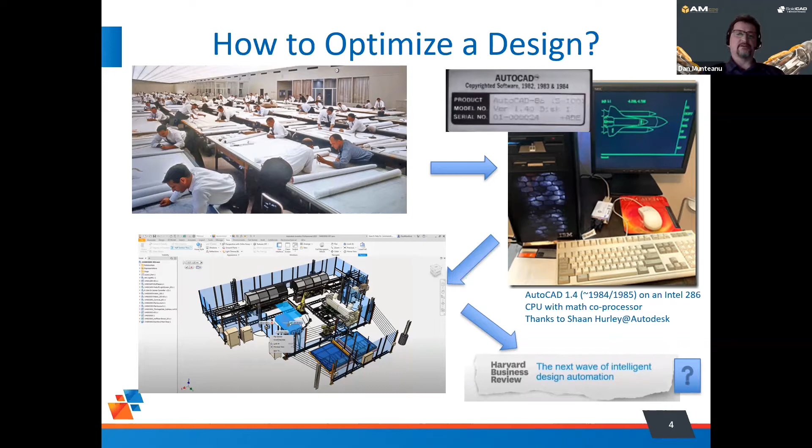All the way to current times of Inventor 3D parametric modeling. And I guess the question is, what's next? What is going to be the next revolution that Harvard Business Review named once the next wave of intelligent design automation?

The traditional optimization methods are pretty straightforward. You take a known solution, you do some simulation and testing, either virtual or physical analysis, to confirm design validity. Chances are changes will be required, so more CAD modeling, and you go back to the first step, iterating and spending more time trying to chase that ideal solution.

We have been doing this for at least 30 years in parametric solid modeling. Newer techniques like topology optimization are already in place, and for those of you who are Autodesk Inventor users, you recognize these pictures on screen — it's the shape generator in the Inventor stress analysis. So nothing wrong with this, it's just that we obtain one solution which depends a lot on the starting shape.

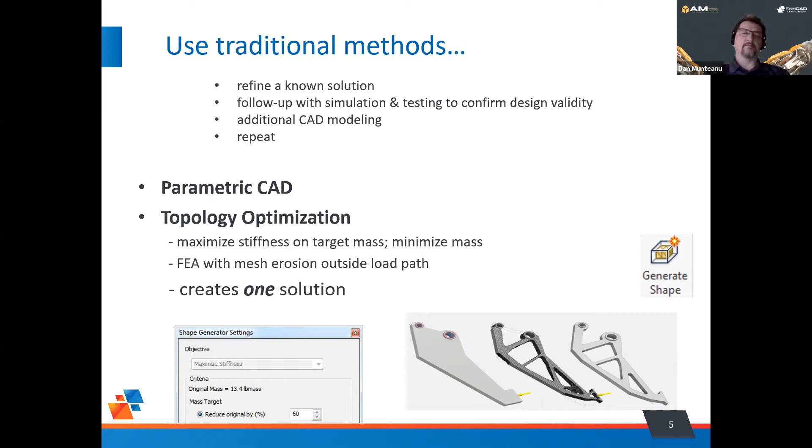It's a technique that simply removes material outside of the load path and usually has a single goal, a single design objective. Moving from here to generative design, we're not just optimizing at that point — we're actually exploring design alternatives, and we can only do this because of the newest artificial intelligence and machine learning algorithms that have been developed quite recently.

This Autodesk generative design solution is cloud-enabled, powered by Amazon Web Services and NVIDIA. It uses different services — EC2, P3 for GPU computing from Amazon, the storage S3, and the machine learning, the famous Amazon SageMaker. The advantage here is we're getting viable outcomes presented to the user at the same time, so multiple solutions, and this explorative approach is multi-goal driven.

So it's a multi-goal optimization process, and users can do various trade-offs for performance. There's lightweighting in place here obviously, but the critical aspect compared to classical topology optimization is the manufacturability of the parts. Different manufacturing techniques are going to be available, as you'll see shortly, and this will allow us to create parts which are ready to go, ready to be produced.

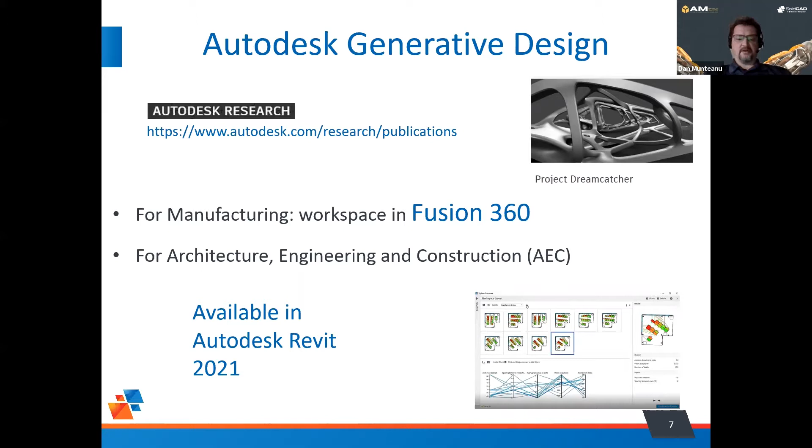They developed what used to be known as Project Dreamcatcher a few years back, and this technology is out in the open. It's not a preview, it's not in beta testing—it's currently being used by customers all over the world. On the manufacturing space, we have an implementation in Fusion 360, and there are newer approaches of the technique starting to become available in other industries, like AEC, currently available in Revit 2021.

So what is generative design, in case this term is relatively new to you? It's, as I said, a multi-goal optimization procedure that enables artificial intelligence algorithms to search for optimum solutions based on multi-goal criteria.

And there are some clear benefits to engineers in terms of being able to look at multiple solutions: improving product performance, picking up the best of the results, increasing product innovation, allowing you to look at multiple alternatives, design shapes that are otherwise even hard to imagine, and not in the last respect, reducing product cost. So improving performance while reducing cost, which is kind of like the holy grail of design.

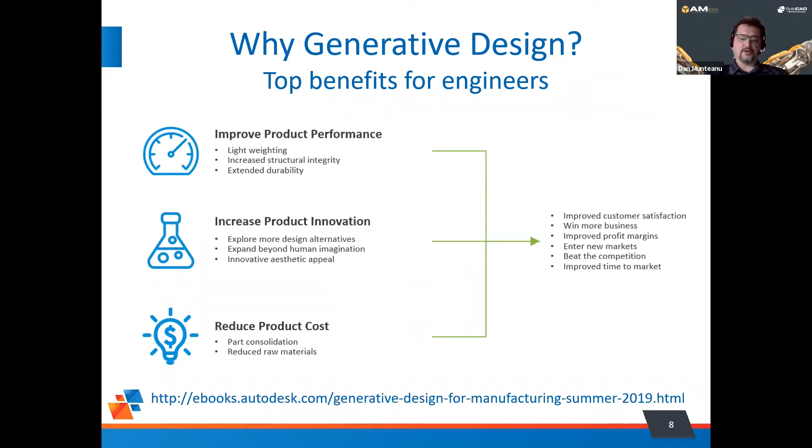If you want to learn more about this, there's a link at the bottom of the slide to an ebook by Autodesk. I encourage you to download and read it.

Now, I mentioned the GD implementation for manufacturing is in Fusion 360. I'm sure most of you have heard of Fusion 360. If not, hopefully this slide will spark your curiosity to run a quick Google search and read more about it on the Autodesk website. It's a cloud-based platform, multidisciplinary, with collaboration at the forefront.

Anything from 3D parametric and direct solid modeling, surface modeling, electronics design—so printed circuit board—rapid prototyping, manufacturing workspace, collaboration, stress analysis, and more newly computational fluid dynamics analysis, as well as, not in the list here, generative design.

Definitely a platform that you want to get to know better and think about where it can fit in your design process.

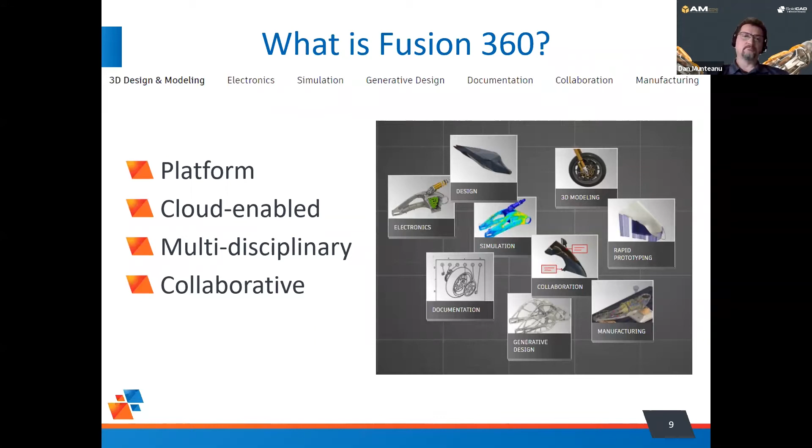So the GD, generative design implementation in Fusion 360, will let you generate multiple CAD-ready designs with real-world manufacturing constraints based on the performance goals you've added. Multiple outcomes is the important aspect here—you're going to be able to explore hundreds, if not thousands, of design variations and pick the ones most suitable to you.

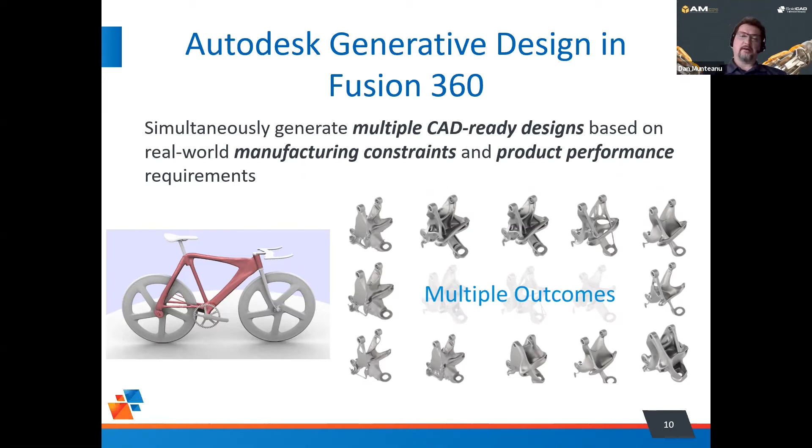Traditionally, generative design is considered a shape generation tool that produced what were half-jokingly called alien parts. Maybe some of you are science fiction fans—what comes to my mind is Ender's Game, the movie where the Formic planet was described. Anyway, alien parts through and through.

But the latest updates of generative design—and by latest I mean about a year already, which in Fusion 360 update terms is probably at least 6 updates—allow for implementation based on traditional manufacturing methods. So subtractive manufacturing methods based on 2-axis cutting, water jet, plasma cutting, or milling are now available for your selection. These manufacturing methods are considered through and through when these algorithms try to generate the shape—so 2.5, 3-axis, and even 5-axis milling, as well as die casting.

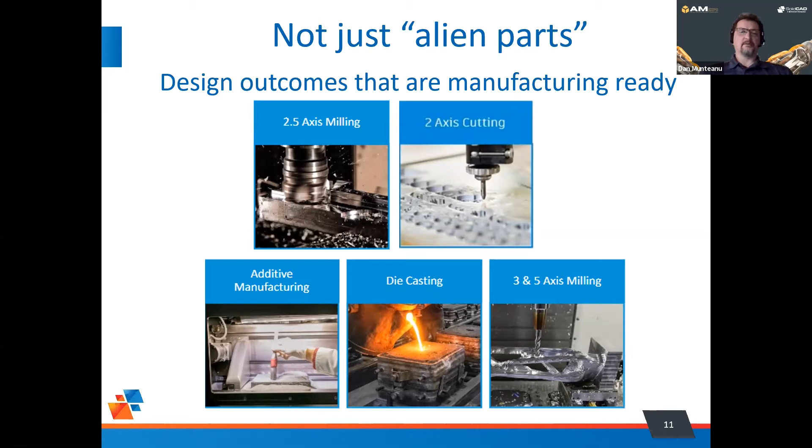Additive manufacturing is still a very important aspect of generative design. Once you really want to go organic shapes and free form, that is probably the only way you can achieve some of these.

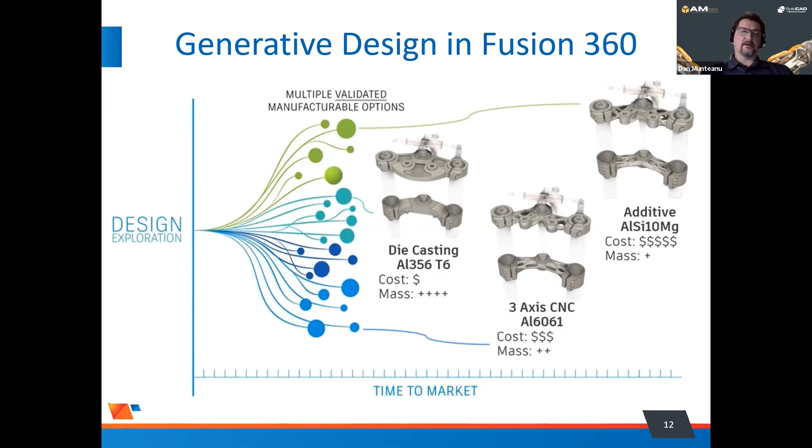So if you consider these advantages of a generative design process: being able to operate with multiple materials and create shapes which have specific strength constraints, cost constraints, mass constraints, and being able to operate within a set of real-life, manufacturable type materials. It's going to be important here, all in the context of trying to reduce that time to market.

Here's an example from a Fusion 360 and Generative Design early adopter, MJK Performance in Calgary. They produce high-end aftermarket parts for Harley Davidson motorcycles. Here's an example of this triple clamp part, where a human design was improved by a weight reduction within still a specified safety factor, being able to produce these parts using 2.5 and 3-axis milling.

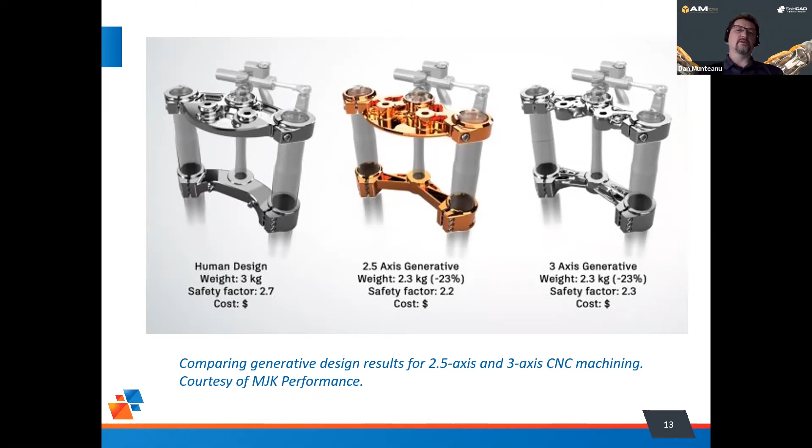Another aspect I wanted to mention before we get into the tool—I promise I won't bore you more with slides—is the fact that we're actually able to look at true manufacturing cost and have that information right away when you make a design decision. This is through a partnership with aPriori. They produce a leading design-for-manufacturability and cost tool that uses large databases of materials, processes, and manufacturing data, tolerances, and so on, to accurately estimate the cost per part for a certain production volume. So you're trying to get to the right balance of manufacturing cost, production volume, material cost, and so on.

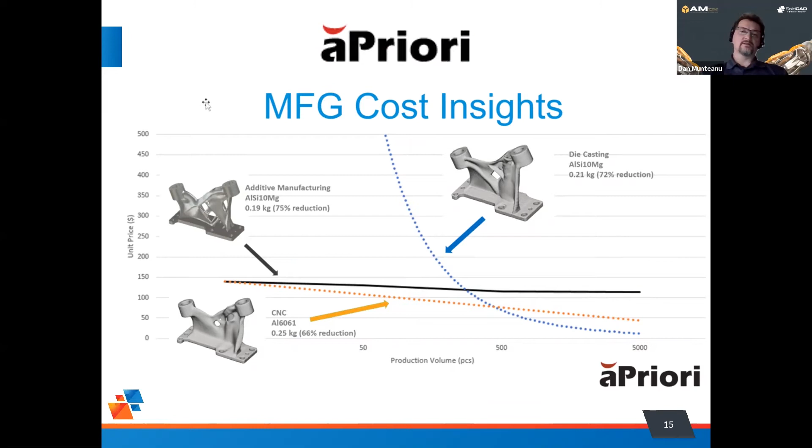So let's look at the generative design process, the step-by-step process in Fusion 360. It is pretty straightforward, like pretty much Fusion 360 is in terms of interface and workflow. Let's say four major steps until you get to actually use the part in your own assembly. So we start with a setup in a design space.

We go for an exploration of the outcomes, so-called, and we take that into the 3D model and validate it. So I'm going to jump into my Fusion 360 here.

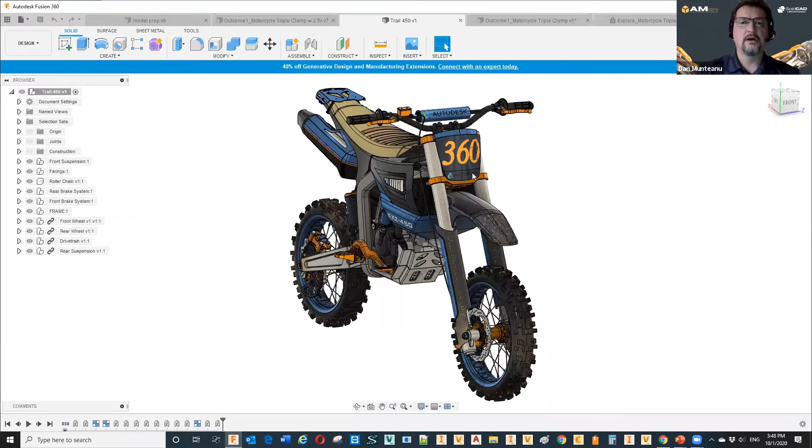I hope you can still see my screen here. All right, so we're going to walk through a simple example similar to the MJK Performance triple clamp. We have here a motorcycle model, courtesy of Autodesk. Thank you. And we're going to take...

We're going to take those into a workspace in Fusion called the Generative Design workspace. We're going to look at some simple geometry creation, and the important part here is going to be to define what's known as the preserve geometry. So keep in, do not modify, do not delete, do not change. Specifically, these are going to allow us to maintain connections with other components in our assembly.

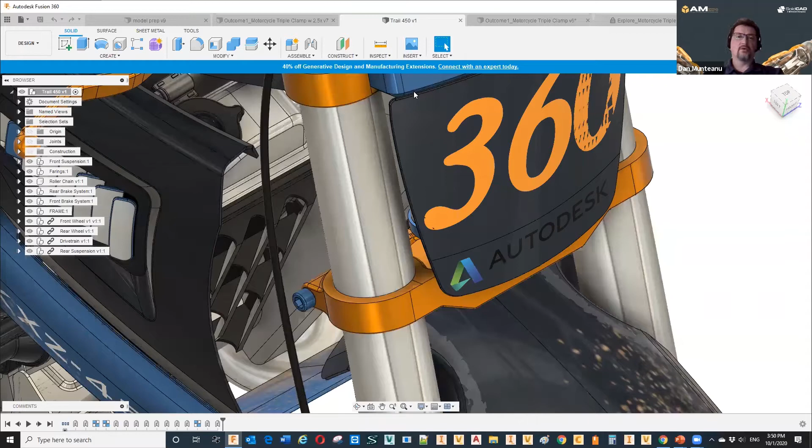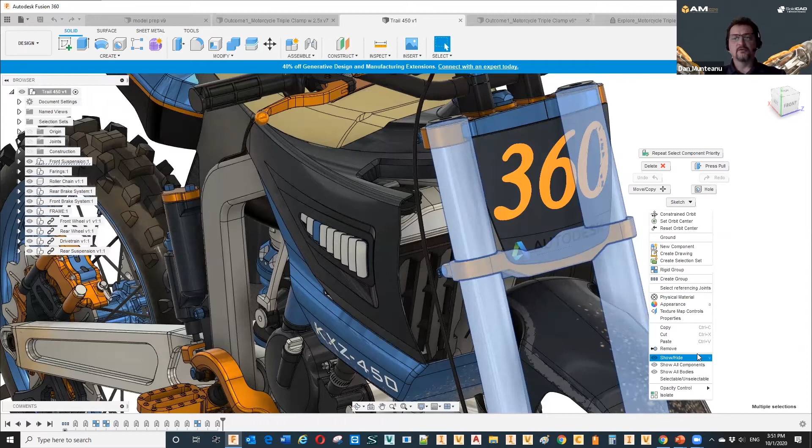We're going to start by selecting the components here. So let's go grab these, right? So we can isolate these, and that will allow us to hide everything. Or we can simply take those and copy paste them into a new design, right?

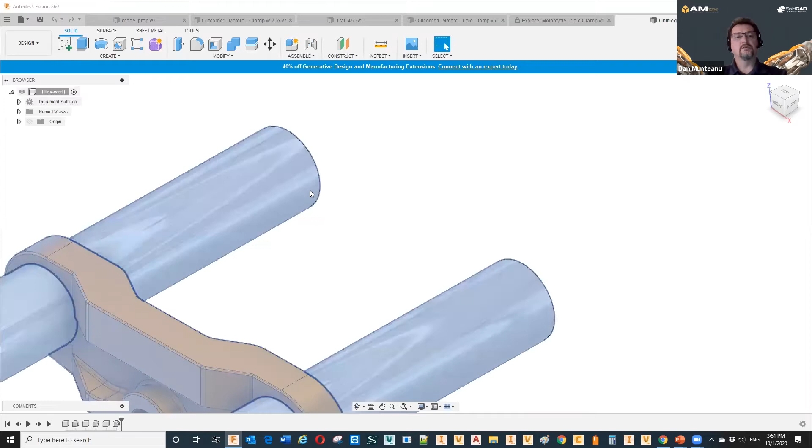So I could also do this and just paste as new, right click into a new design here, and let's just take a look. So we know we're going to want to connect with these two struts. This is the current design. Let's see if we get...

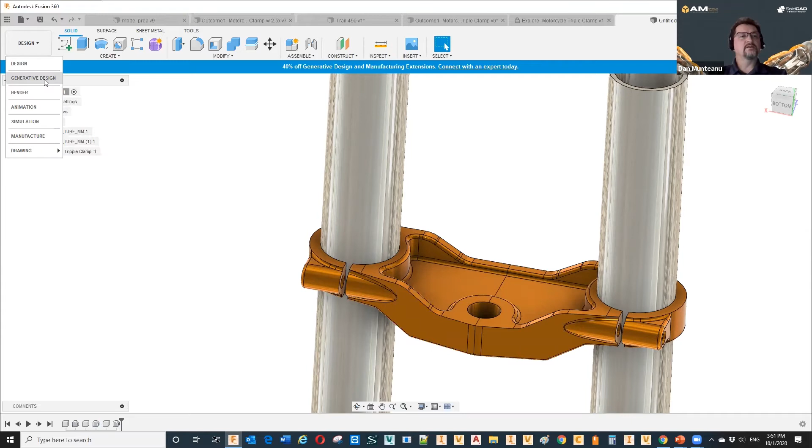Artificial intelligence algorithms to generate something different. And we're going to go to the Generative Design workspace now. So in the Generative Design workspace, we have this opportunity of creating now some additional geometry that we will use...

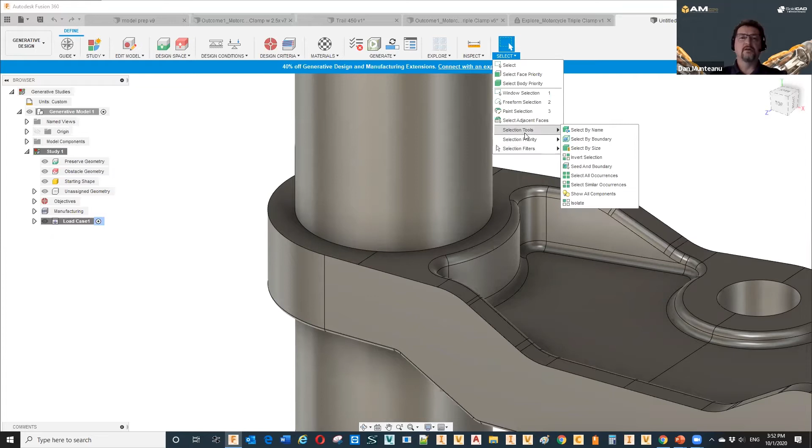As preserves as well as keep out. So for example, for those of you who maybe have not seen Fusion before, if I'm going to jump into the edit model here, if I'm to create a sketch on this face and maybe project some geometry...

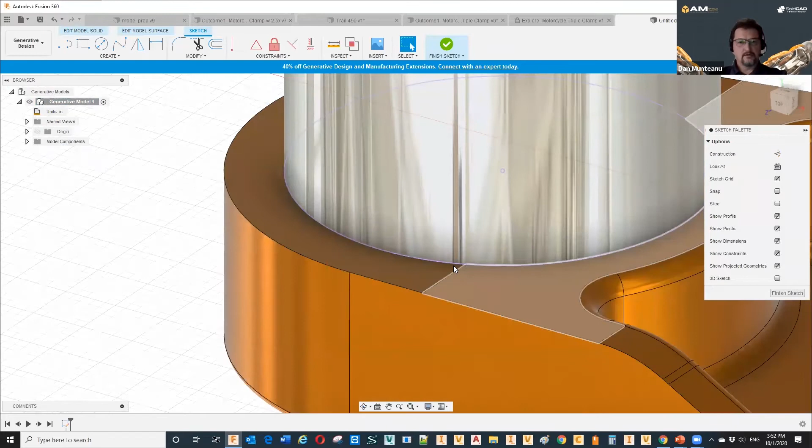And let's say offset that projected geometry, which was here, a certain amount, right? So I could take that. Let's do the same here. I could take that and use it as a sketch to be able to create my extrude. Let's say 8.5, right?

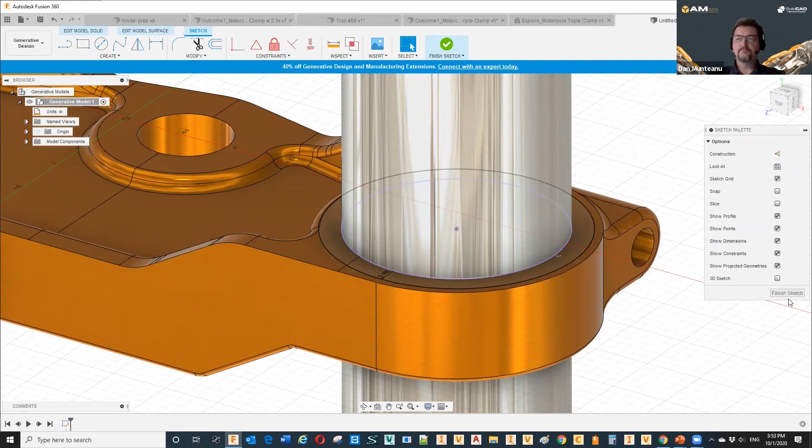To create my preserve regions here. So these are going to become now new bodies, new solid bodies. So I'm selecting these. I'm creating a solid body of a certain height. So a typical parametric solid modeling.

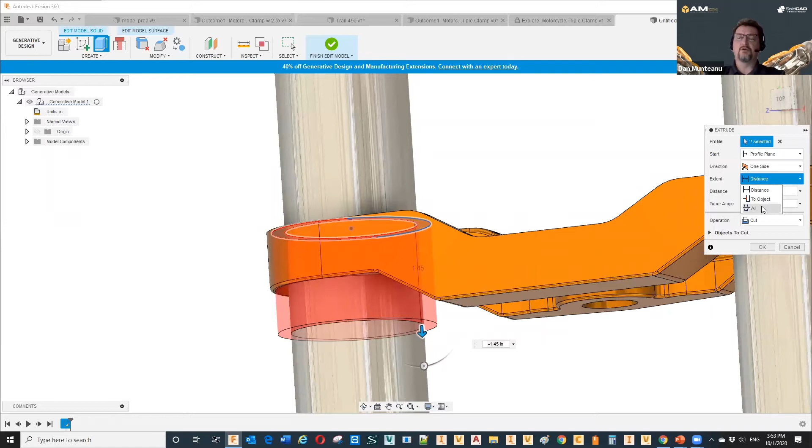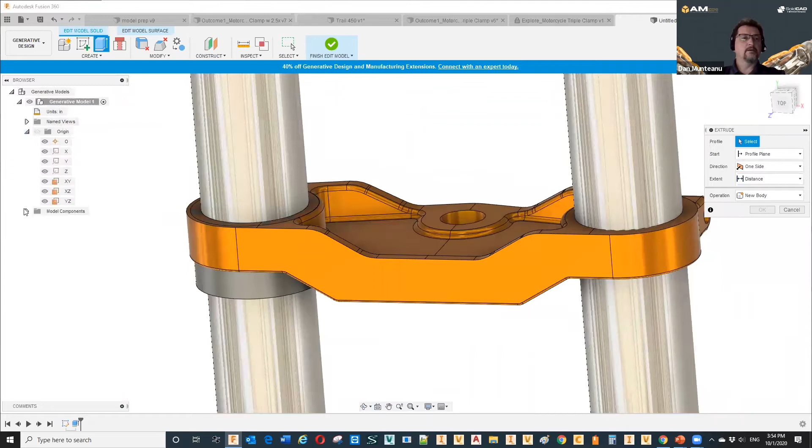The advantage, though, is the fact that I'm doing this in the context of my generative design environment. So why is this important? Well, it's important because it actually does not affect my other design, my overall components. The sketch got hidden here, so let me just go back and turn it on.

Some preferences which you can tweak. So I could go and say to this depth, right? The software switches to cut because it detects more solids there. I'm just going to create that.

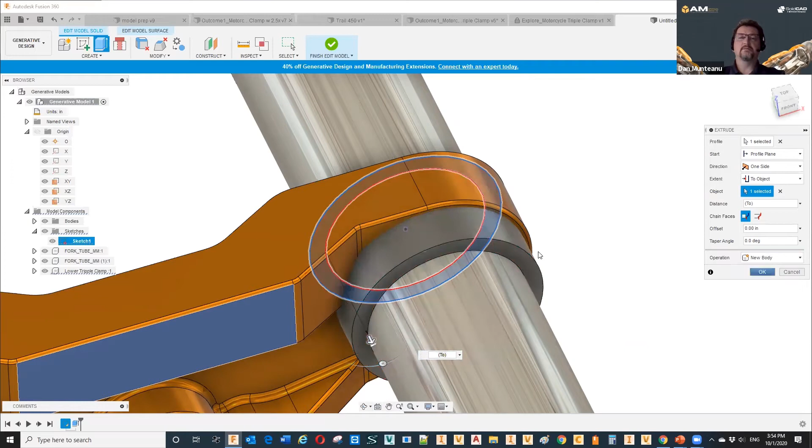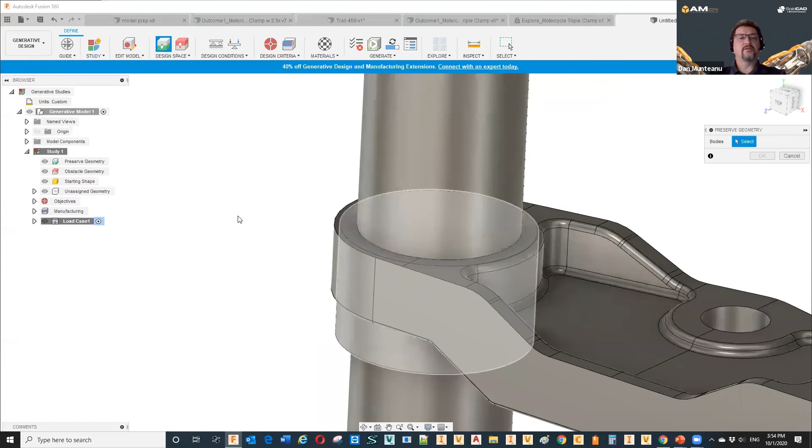So this allows me, as I said, to use some of this geometry as preserve and define it as such here. So I'm going to go and say this is going to be geometry to be preserved. In other words, I want to preserve that internal diameter.

I don't want generative design to add material there, or maybe somehow create a shape that will not allow these struts to fit in. So that's my preserved geometry.

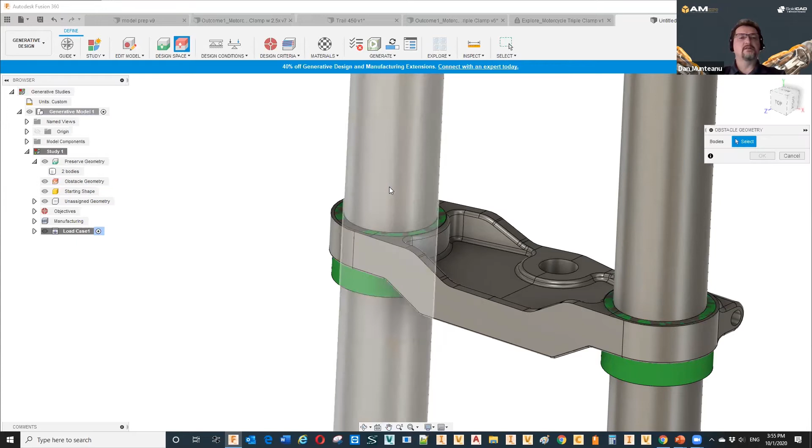And now I'm selecting the obstacle geometry. So for obstacle geometry, I could go and select these two, okay? And I also have, and that's an option, you could choose to skip this.

You could start with a starting shape. So if you want to, let's say, improve on this, you could choose this as a starting shape, right? That's also going to be allowed to be defined here. Now, this starting shape, in fact, if I am to maybe unselect it, could also be simplified. So I could go and say, edit the model.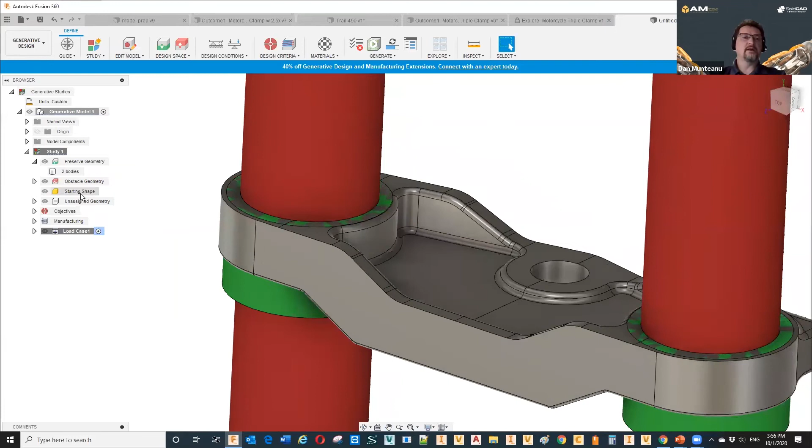Here it is. I'm back into editing mode, which again will not affect the original body. What can I do here?

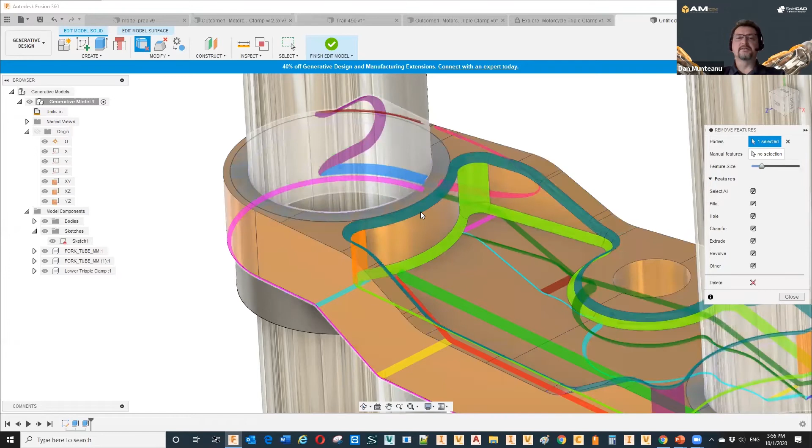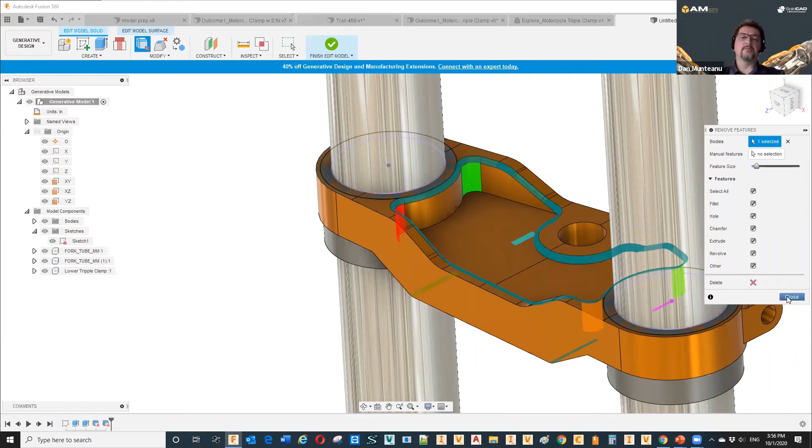Well, I could actually go and maybe remove some of the fillets and chamfers, trying to get to a simpler shape to allow this generative design strategy to figure out an easier solution, reduce the complications if you want. So I'm doing a so-called defeaturing by removing fillets and chamfers of different sizes.

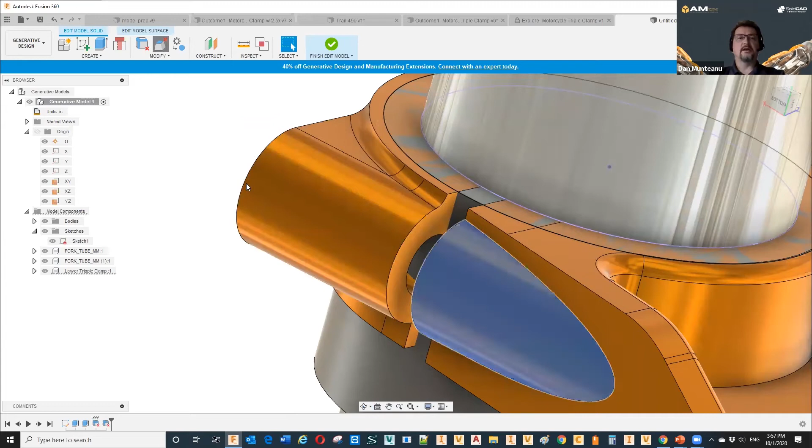You could also use remove face, for example. So if I go and select that and click delete, right? So you're basically simplifying the model enough to allow you to define that as what is this, in this case, a starting shape.

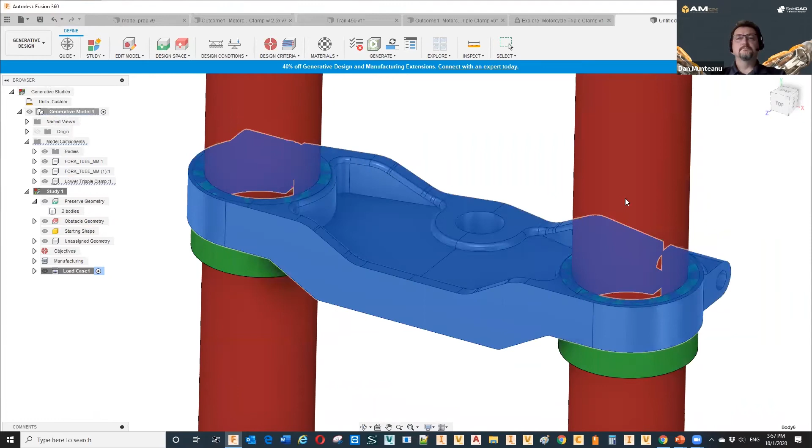Now, once you have all these defined, let me just jump to a slide here. You're going to define the objectives and the limits. And this is an important part. It will tell the algorithms what is the goal. What am I trying to get to here?

The options are minimize the mass, or maximize the stiffness in the context of a target mass, or go for a certain target safety factor. As I mentioned earlier, Fusion 360 goes through many updates, and the technology keeps on improving. There are some options there for you to turn on if you want to explore. They're provided as a technology preview now, and they won't be visible unless you do turn them on.

It will also allow me to define a maximum displacement and a specific modal frequency as my goals. Why would this be important? Well, maybe I can't allow this part to deflect more than a certain amount, because maybe it's in a tight space. It will go in contact with some other components, wear and so on problems. Or maybe it's in a vibratory environment, and I'm trying to get this to avoid certain frequencies.

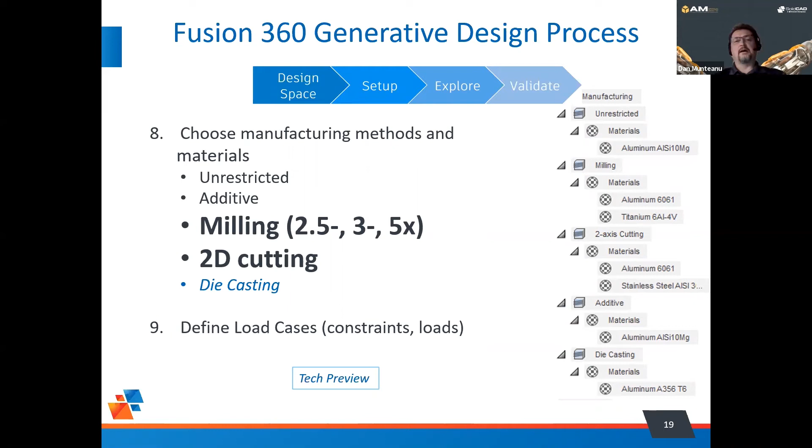So my component should have natural frequencies and mode shapes outside of a certain range. As you can probably imagine at this point, by adding these constraints, and by creating the so-called load cases, loads and constraints — we'll come back to this — we're actually asking the software to do many calculations.

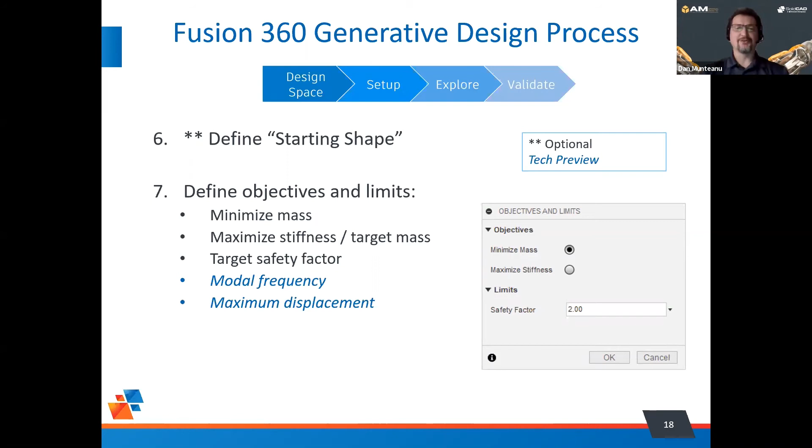So there'll be linear static analysis or modal analysis run on every single design iteration that the software produces. Clearly, something like this is not possible unless you use some cloud computing capabilities. This will not run on my laptop or on your desktop. So cloud solving only.

So let's go back here, and I'm actually going to jump on my model here, where I cleaned up a little bit more. So here's my starting shape. What I did here is go and create these as design objectives: minimize the mass and create a target safety factor of 2.

So here's the other option with a mass target, as well as define the manufacturing methods. So this is the critical part.

Sorry, looks like I'm starting to be short on time here. Okay, so Dan, yes, we're cutting into the question period. It's okay, keep going, because you are getting to the sexy stuff here. Well, this is the important part. Sorry, yep, please go ahead.

Yeah, so what we're doing here is we're telling the software to look for solutions that are actually viable, that can be created, and the methods are going to be based on your settings here. This is something you can choose to select or not, based on what is it you have access to. So if you don't have a 5-axis machine, well, you're not going to define a 5-axis configuration here.

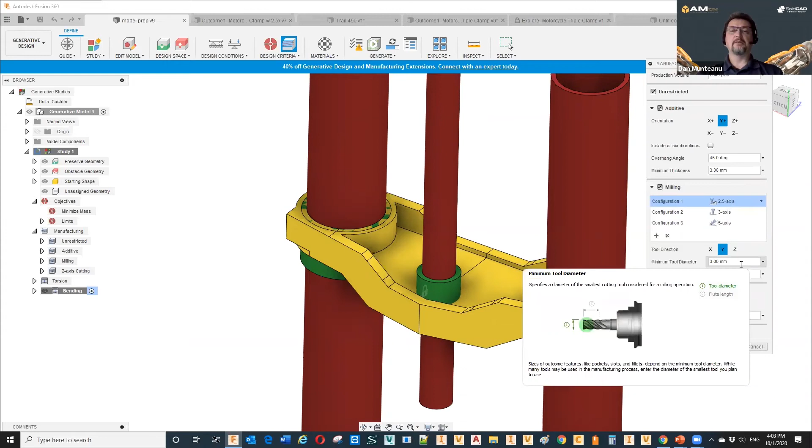So the software will generate these shapes trying to fit this criteria. For 2.5 axis, there's minimum tool diameter and minimum wall thickness. On the 5 axis, it's head diameter and shoulder length, as well as minimum tool diameter. For 2 axis cutting, it's minimum wall thickness and the approach direction.

And for die casting, if I were to choose that, there would be the ejection direction, so let's say this would be Y in this case, minimum draft angle, minimum thickness, and so on. This is going to be critical. Also, the production volume up top, how many parts I want to produce, will be important to give me a cost estimate per part.

So once you set this up, you're now ready to start defining materials. Sorry, I should have gone to this part right here, materials. You have up to 7 materials per manufacturing process to choose from, plenty of materials in the library here with cost information.

And at that point, you're starting to really look into the details of, if I'm going to have a milling operation or milling process here, what are my options in terms of real materials that I could use, and so on. Lastly, what you have is the ability of loading the part.

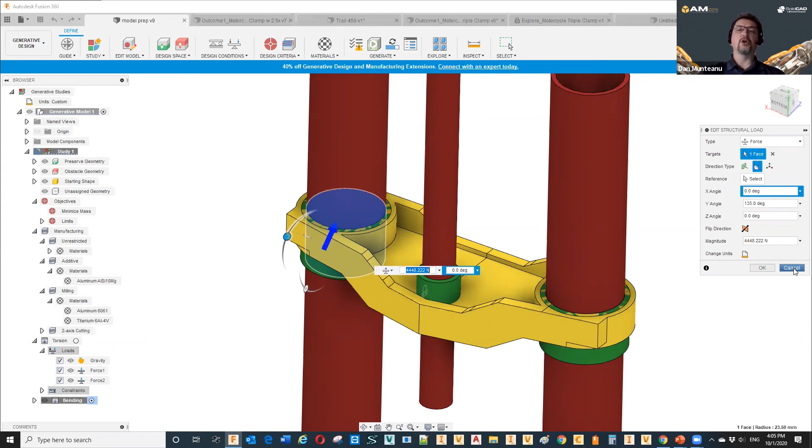Remember, I had earlier a safety factor that I was looking at. Well, this is in the context of some linear static analysis that the software will run for each iteration, to be able to let you set up the loads that you're applying to the part.

So in this case, I'm applying, if I'm to maybe switch this to wireframe, some loads in the opposite direction, pretty much arbitrary direction there, to twist this part around the x-axis direction, as well as a set of bending loads that will bend this about the z-axis. I'm also holding the part, so there's a fixed constraint in the center.

So you're coming up with what kind of loads my part will need to be able to support, and the conditions based on those materials in terms of safety factor, maximum displacement, and so on. So when this is ready, you have the option to do a preview here.

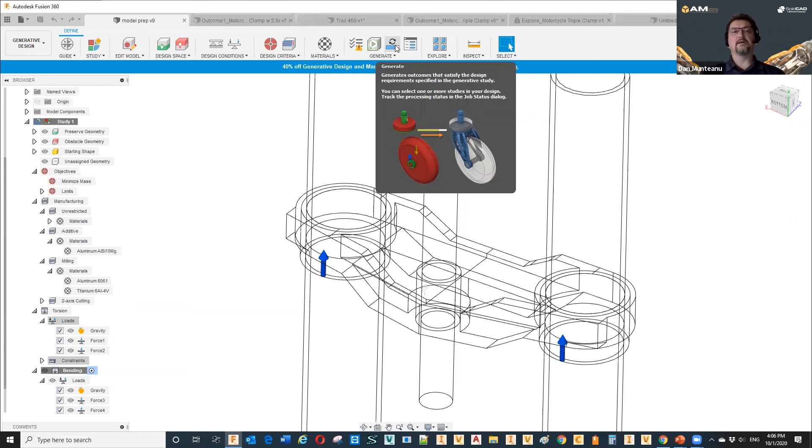See, if you set everything up, the software will start to generate a basic shape. And if that looks okay, then you can hit the generate button. This gets sent to the cloud, and then the calculation process starts. Depending on how many conditions and materials, how complicated the geometry is, and how many preserves and obstacles you have, this can take a few hours.

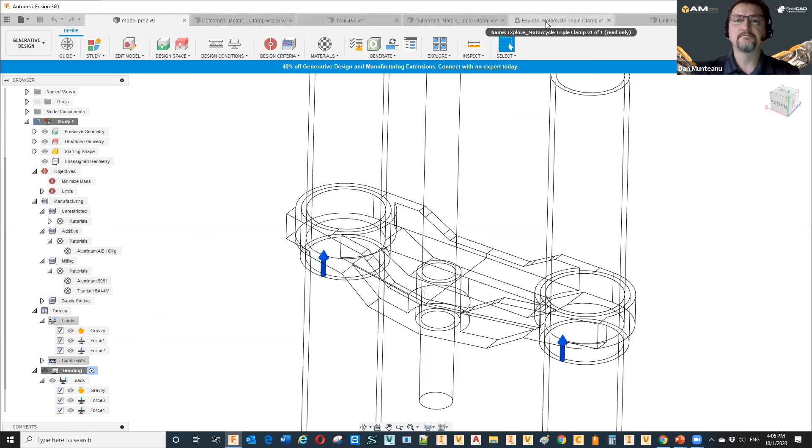So once you're ready, let me just jump to the outcome here. Actually, before we go there, let me go back to this - I'll hit the explore button. This is the exploration phase. So you are now the happy owner of many thousands of different options and variants.

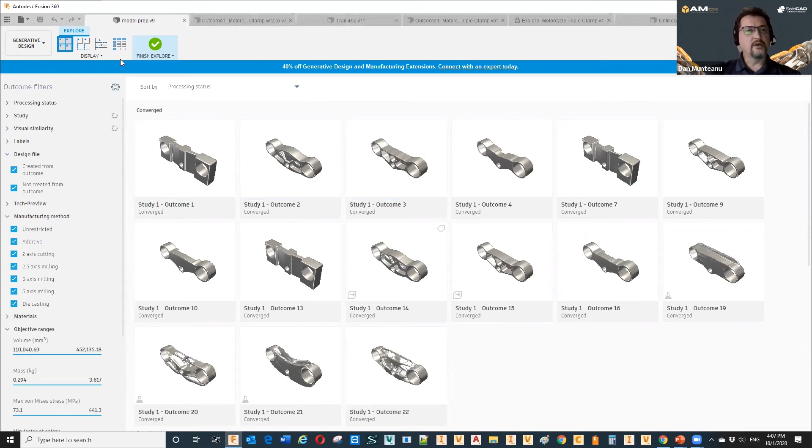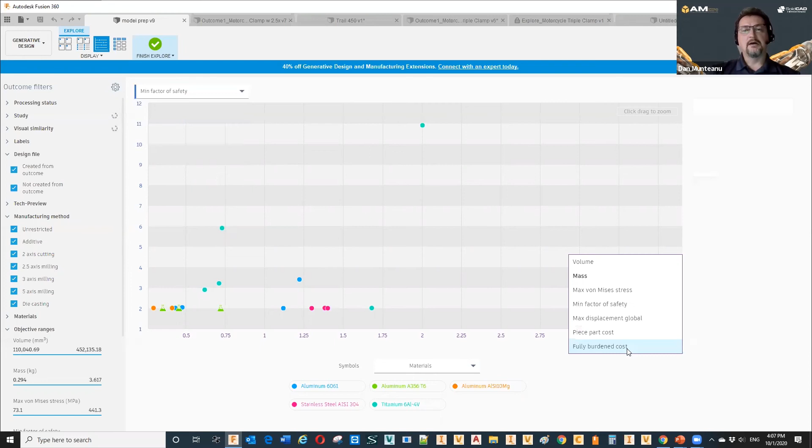And we have this very nice tool, a scatter plot, to be able to start exploring the results. So I'm looking at all sorts of outputs, let's say von Mises stress versus mass, or minimum safety factor versus mass. So you're exploring all these variants, zooming in to figure out which one actually makes the most sense to you.

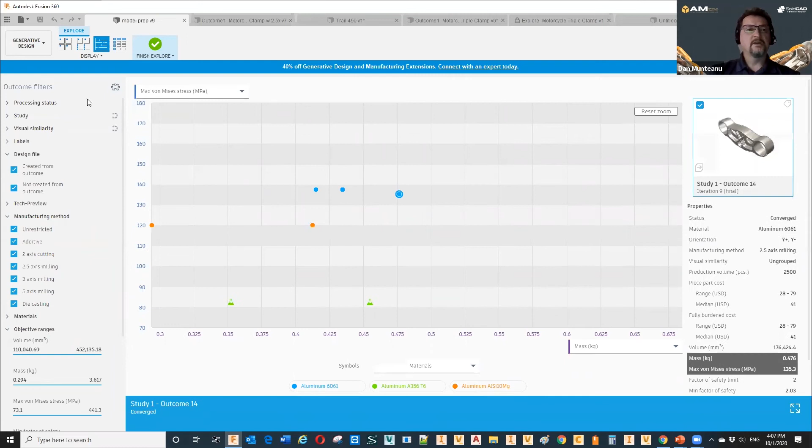And as well as you get some cost information here, as well as the manufacturing method. You can also do some comparison. So I could go and, let's say, isolate the 2.5 axis. Let's take this one and that one, up to 4, and compare them side by side, to figure out which would be the one that might suit better.

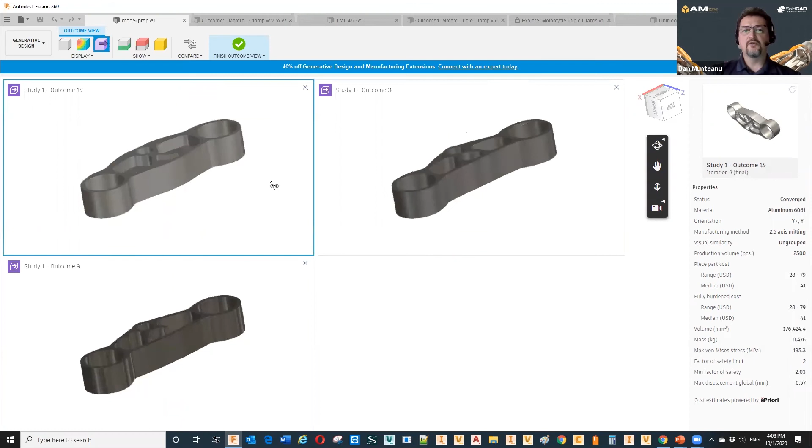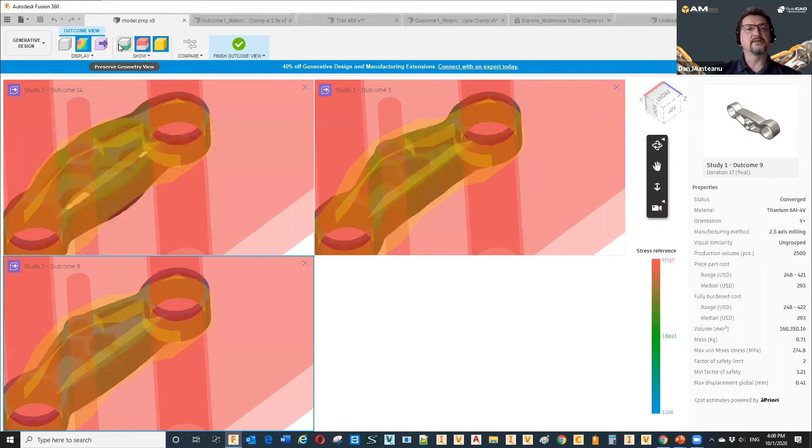You're looking, in general, for converged solutions, not just completed solutions. Converged solutions means the criteria have been met, as opposed to just the calculation had to stop because no other shape was being able to be generated. So here's a stress plot here, as well as the different obstacles and preserves and original shape that you started from.

So once you're ready, once you say, you know what, I think I'm ready to take this and produce, then you're going to create a design. So this is actually going to be watertight, solid, that you can modify further if you really want to. Or you take that into a mesh if you want to maybe create that through an additive process.

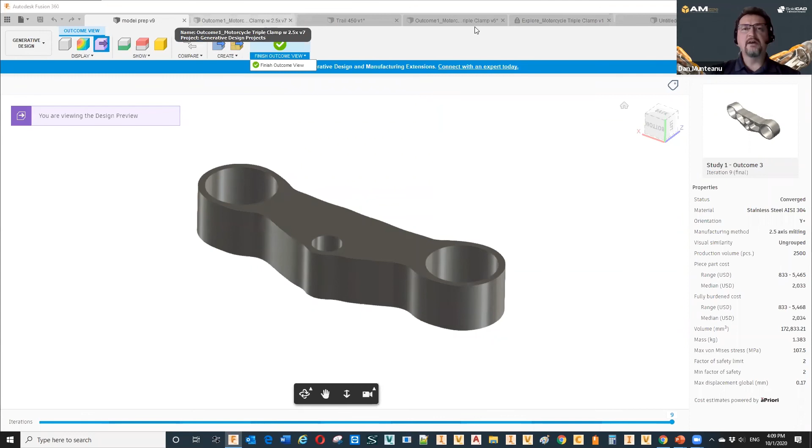So this is what I have here. I took one of these and exported. So if you want to see how it's been built, you actually get to look at the preserves and the different shapes here.

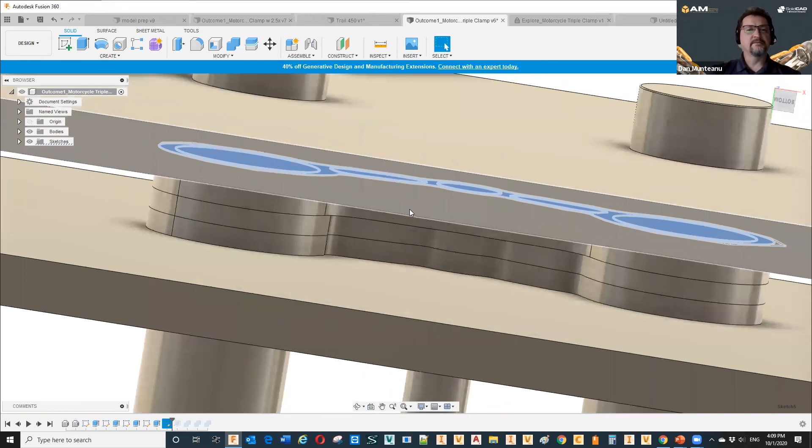So the big plates, like geometry that you see, were created as obstacles. This is built in layers, in steps, and the software creates the final shape by merging all of these.

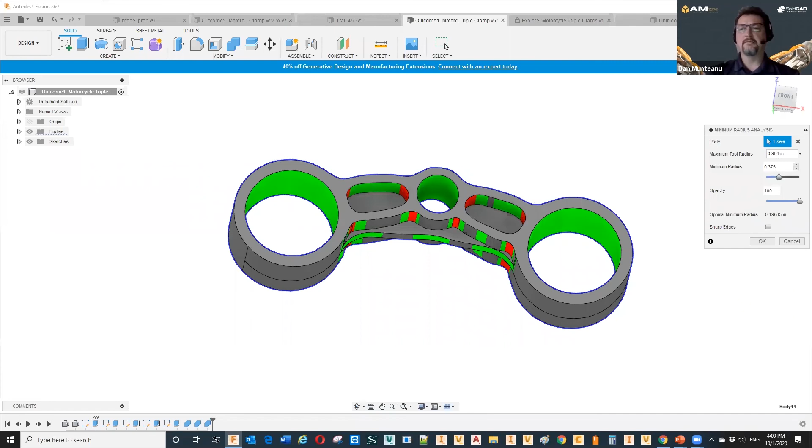Some very neat tools here before we run totally out of time. For example, minimum radius analysis: if you say, well, I don't have a cutter smaller than 3/8, so I won't be able to get into these round corners. Draft analysis again: is this really 2.5 axis or 3 axis, or do I have to do maybe multiple setups, or maybe create this as a 5-axis process.

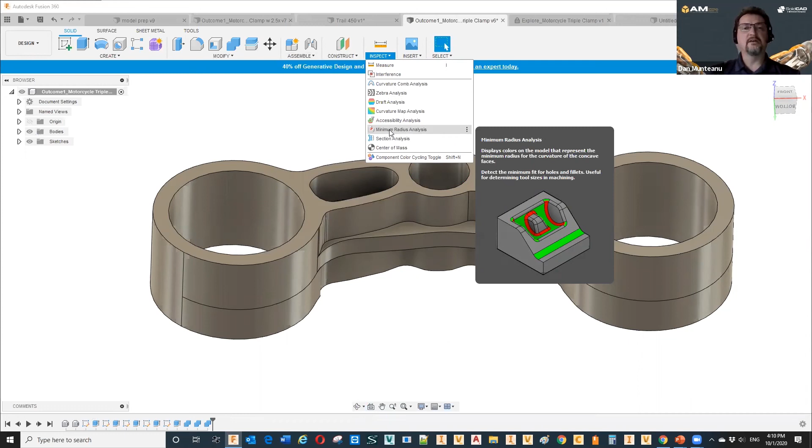Obviously you'll get all that information right away based on the filtering, and you can make your decisions appropriately. So from here, what you do is take that and throw in some table and vise geometry, get into the manufacturing environment, and run your toolpaths and post-process those, generate NC code, and make sure you have what you need to actually produce the component.

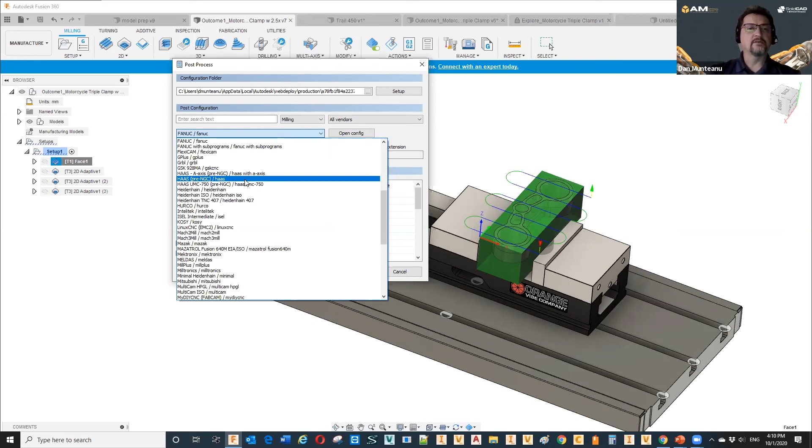Okay, so I'm just going to do a quick NC file here using a Haas post. So anyway, sorry, I totally lost track of my time here.

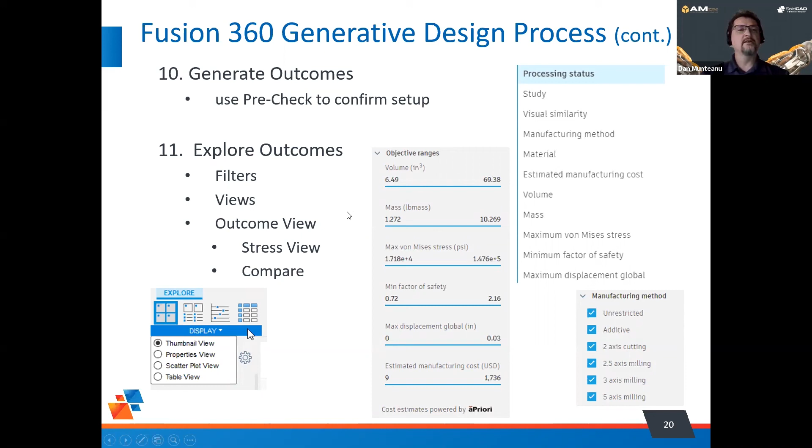Just to kind of clarify here, you're going to generate the outcomes, use the pre-check, and the job gets sent to the cloud. There will be some cloud credits cost associated with that, or you can get the unlimited generative design extension for Fusion 360. Then you explore the outcomes, filters, and views based on properties.

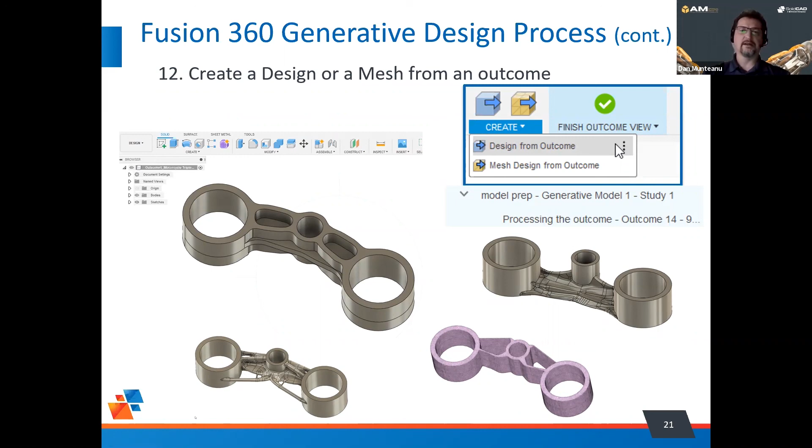Once you decide you found the parts you want to process, you create an outcome from them. Then what you could do, as I was showing, is create NC toolpaths in a manufacturing workspace, or run another type of analysis. Maybe I want to do some kind of fatigue analysis, for example, or export this to ANSYS Mechanical, or to an STL file to study further in Autodesk Netfabb. So you have geometry that is fully usable at this point.

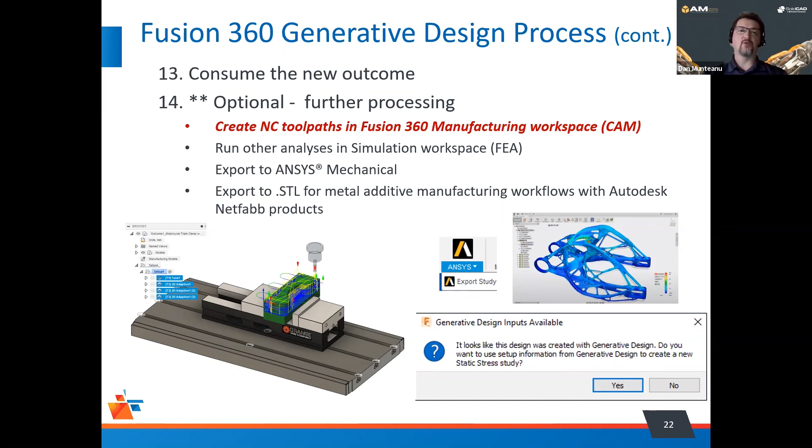We have exactly 3 minutes. Thank you very much, Dan, that was very informative. I kind of like the way you make CAM sound like just an afterthought to the whole process. Like, no, that was not my intention - just teasing. Any CAM questions? Louis is your expert.

So yeah, we do have a bunch of questions. I actually have quite a few because I haven't played around with this yet. I'm really curious about the distinctions between 2.5D and 3D. When you choose 2.5D, is material being removed from two sides of the part?

Yeah, that's right. So going from, let's say, a 2-axis, which is a pure 2D cutting operation like water jet, plasma, sheet or plate material, to a 2.5, that will remove material from the opposite side - that's the difference.

Okay, well, what about chamfered surfaces? Would there be any chamfers in 2.5D or not? In general, no, but you have some options to modify the part further if you need to. If you think certain areas might need a thicker wall, then you could take that and apply some drafts.